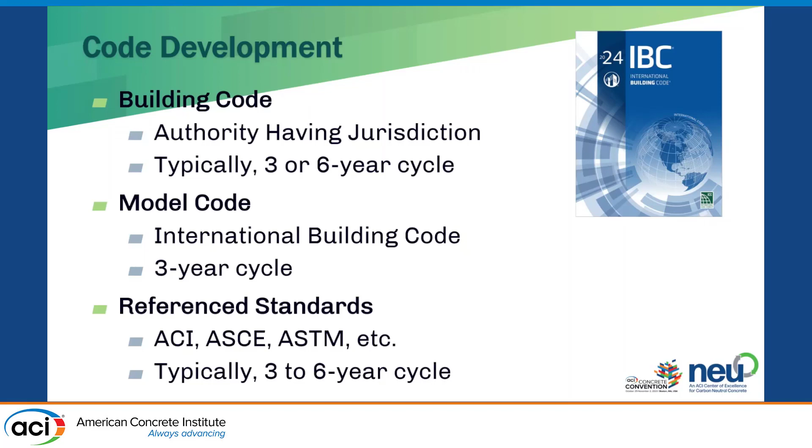ASTM and ACI standards, because of the complexity of the subject matter, can take 10, 15 years to get developed. So it is a relatively slow process. The reason a lot of this is slow, though, is we need the assurances that everything's going to work right. So that's an important aspect of this.

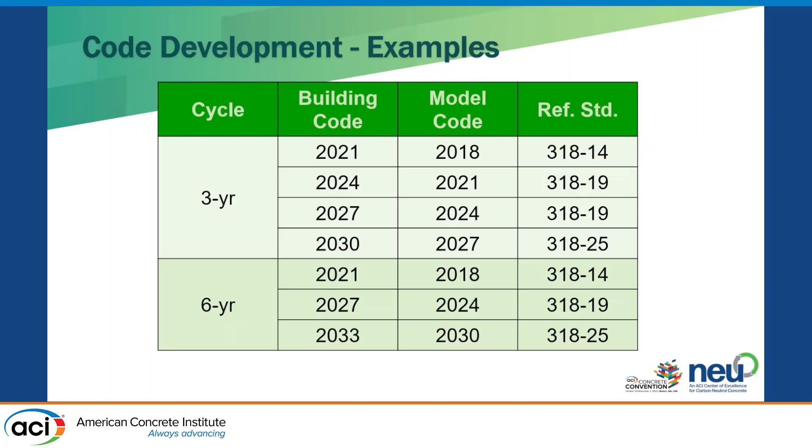But this gives you an idea of the building code referencing ACI Standard 318. ACI Standard 318 is on a 6-year cycle. If the local jurisdiction is on a 3-year cycle, and right now they might be looking at the adoption of, or developing, a 2021 building code for their jurisdiction, that would be based on a 2018 model code, which then references ACI 318-14. So that shows you the time lag that is out there.

When we're looking at the model codes, there's a model code where carbon neutrality of concrete or every other building material could fit quite well, and that is the International Green Construction Code. It's administered by the International Code Council. The technical content is actually developed using the ASHRAE process through an ASHRAE committee. It's ASHRAE 189. So it's a joint initiative. Again, the technical content is all handled at ASHRAE. ICC only focuses on the administrative content, or Chapter 1 of the code.

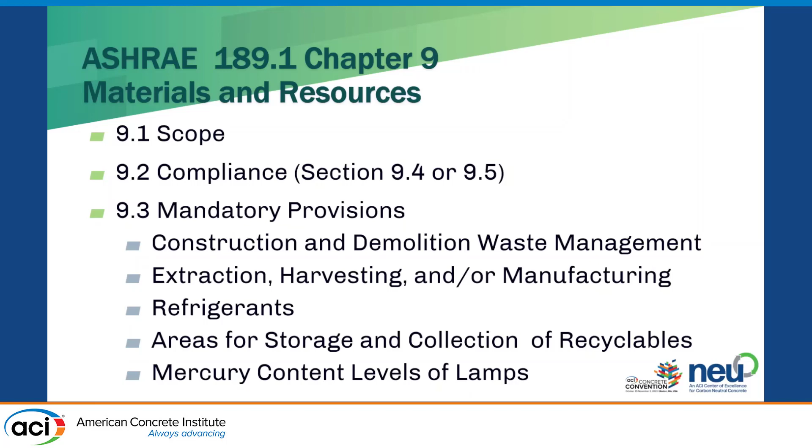What the code currently says is that you need to be reporting EPDs. It doesn't go into what level of performance needs to be required. Right now, we just don't have enough EPDs out there. So they're just trying to encourage more EPDs and allow the design professionals to make their judgment calls as to what products they select based on the available data. So it needs to be an industry-wide product declaration. A Type 3 declaration means it's verifiable and developed with approved product category rules.

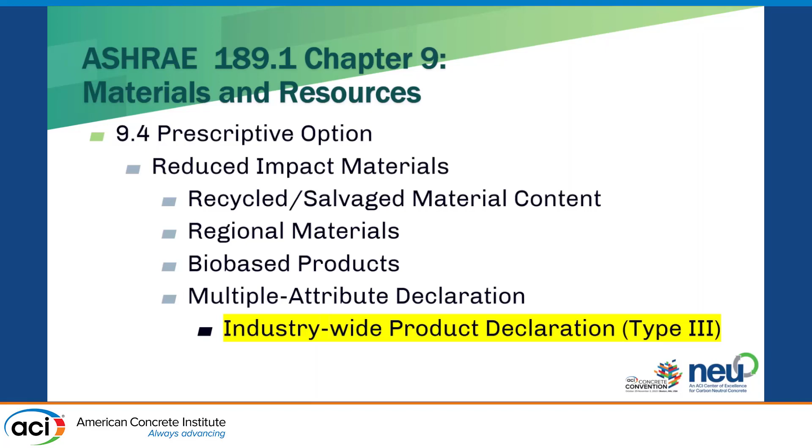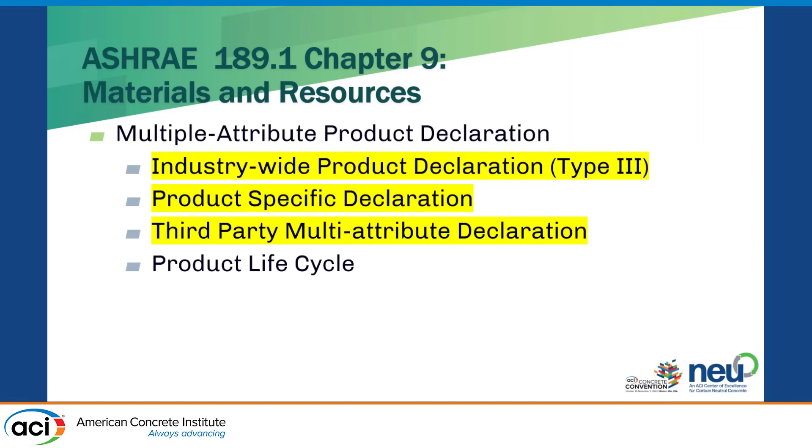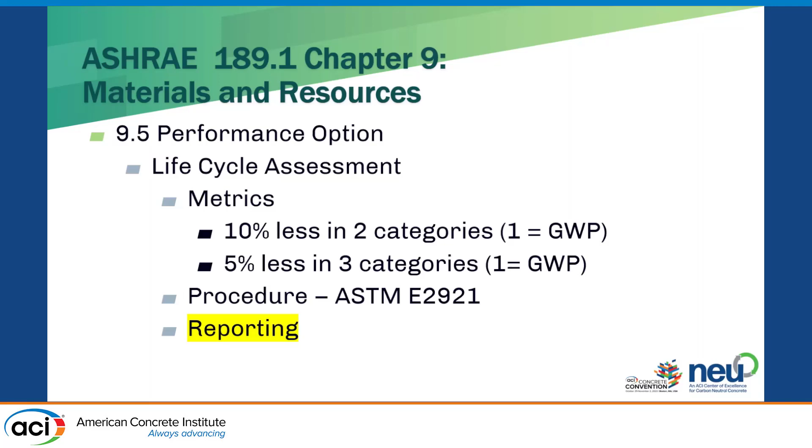So we have these environmental product declarations as well as other criteria such as, is the material regional, is it bio-based, recycled, but that's the extent that is covered when it comes to the attributes of materials in sustainability. So we have these options. It does require third-party multi-attribute declarations. So this information just needs to be generated and put out there. And the most important thing, as I previously mentioned, is they're really looking at getting the reporting out there so that everybody understands what we're doing and we can get a track record of how things work.

Now, the EPDs right now tend to be focused, at least for concrete, on these 8 categories. So this is what you'll see in a typical EPD for concrete if it's in the National Ready Mixed Concrete Association's database. That doesn't mean these are the only things that matter. I was talking about the ASHRAE 189 standard. That's ASHRAE 189.1 for new buildings except 1 and 2 family dwellings. But then there's other criteria that might be required depending on the particular application.

There's ASHRAE 189.3, that's for hospitals, and they're looking at some other possible considerations for what must be reported because of the potential for ionizing radiation, human toxicity, particulate matter. Those come into play if I'm dealing with a healthcare facility. So it depends on your facility and what can happen. If it's a healthcare facility, one of the things that might come up for human toxicity related to concrete wouldn't be the concrete itself, but it could be any sealers or coatings or materials that you're putting onto the finished concrete.

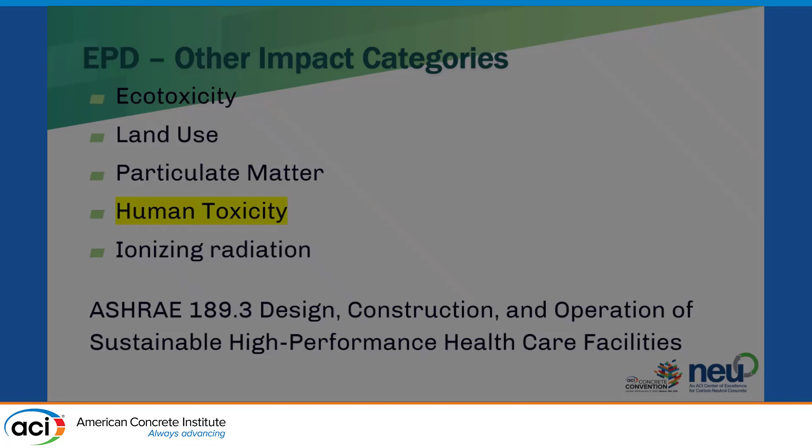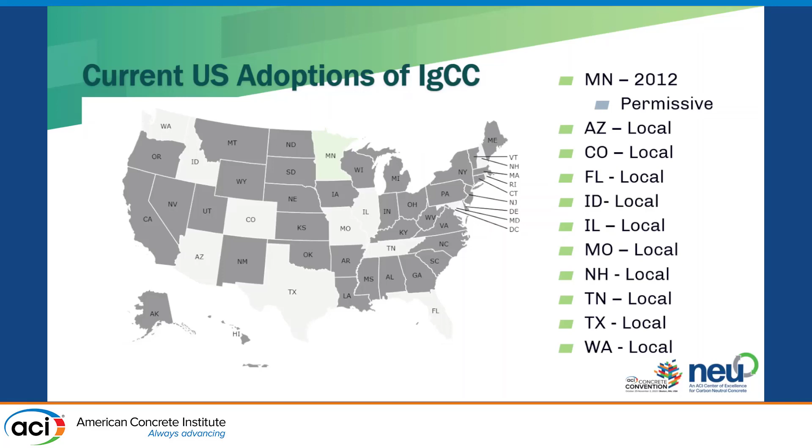So the IGCC is permissive in Minnesota statewide, and in all these other places there may be one or more local jurisdictions that have adopted the IGCC. So it has not been widely accepted across the U.S.

So the New Building Institute, a very aggressive organization trying to help get us to carbon neutrality, brought in a code change proposal to the International Building Code. This was brought in the last cycle. The code change, if you go to the ICC website, you can find it as S178-22, but it set specific limits on the CO2 content of mix designs based on compressive strength.

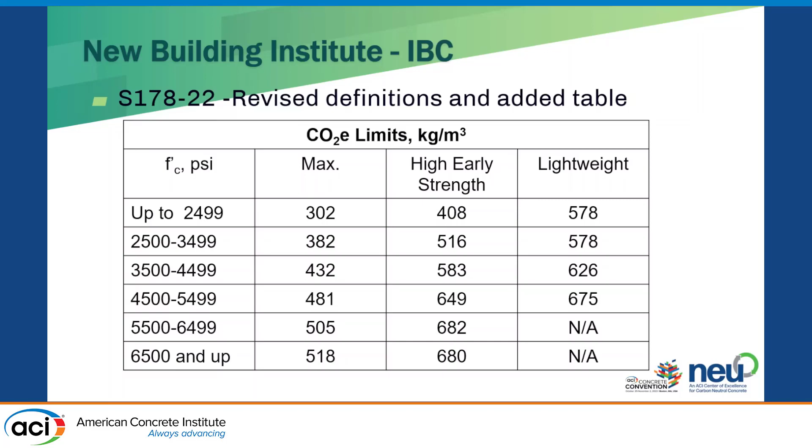So this was a proposal. It got disapproved. It was part of a huge proposal that was covering glass and steel and wood, and industry opposed it because it was viewed as somewhat oversimplifying the whole concepts, and the building code officials voted to disapprove it because they didn't want it in the general building code. They felt it belonged more in the International Green Construction Code.

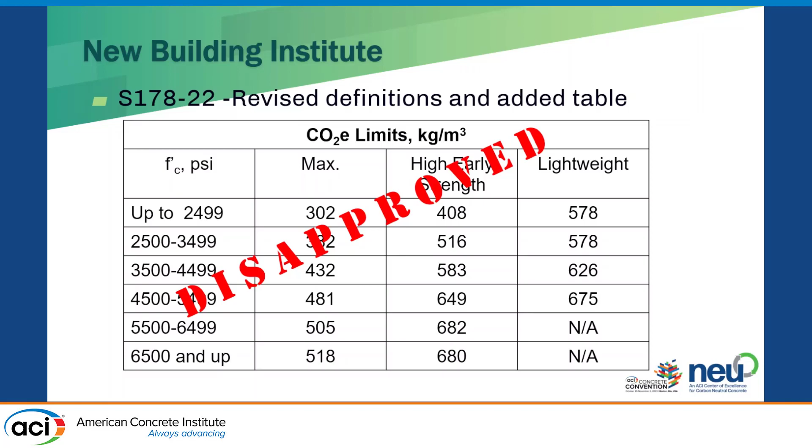So there was just this general conflict of, well, we want to make something happen and we wanted to make it happen everywhere, and the IGCC is only adopted in a few places, so it became cumbersome, to say the least.

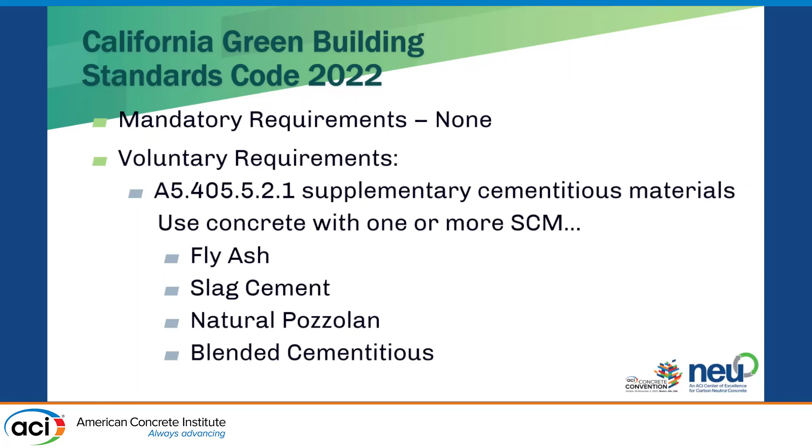There is also the ICC 700, which is the National Green Building Standard. This is for 1 and 2 family dwellings. There is Chapter 6 on resource efficiencies. So they do address that. They do talk about things that you can do, but they're voluntary requirements when it comes to using concrete with 1 or more SCM. But again, it's moving in the right direction. It's a slow process because of all the complexities tied to this.

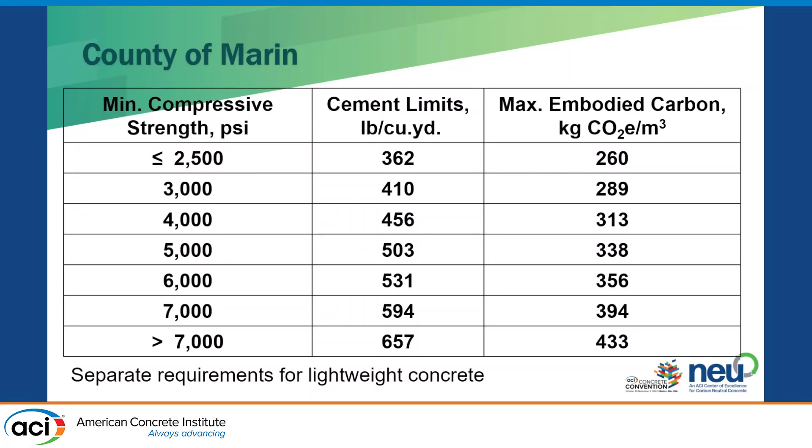Marin County in California took the NBI recommendations. So in Marin County, California, there are currently these limits for CO2 content of your concrete mix designs.

Washington State: NBI made this proposal to make modifications to the building code to comply with their section 1901.8.1, and it exempts small projects, it exempts precast and shotcrete. So it's viewed by some that this might be upside down.

The low-hanging fruit might be low dosage Portland cements for sidewalks, driveways, foundations, footers, small projects where there's a lot of them. Just like Mary was saying before, the concrete by itself doesn't look all that bad on her graph as far as the global warming potential. It's just that there's so much of it. So why not go after the larger volumes of concrete versus larger building types?

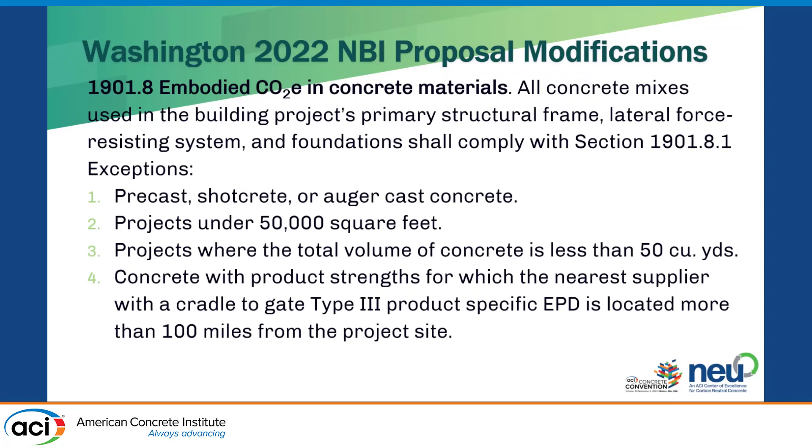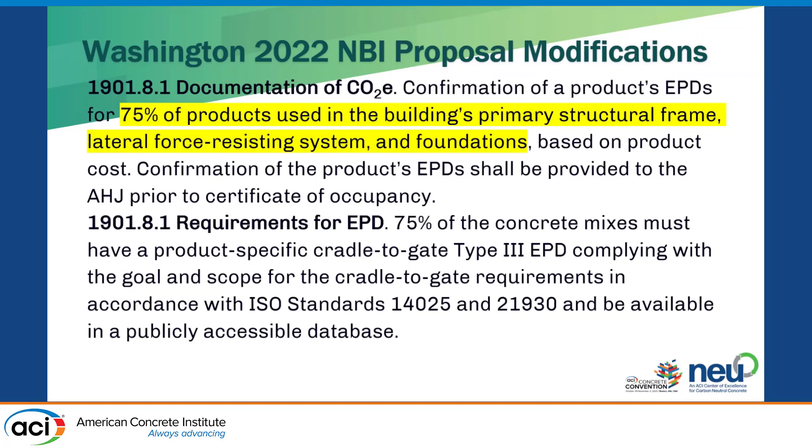So as we continue to look at this, this is pretty common as to what happens when they try to bring these specific requirements in. It tends to get backed off because of the comfort level of those writing the rules and regulations, so that it ends up being report EPDs. There's not enough EPDs out there for all the concrete.

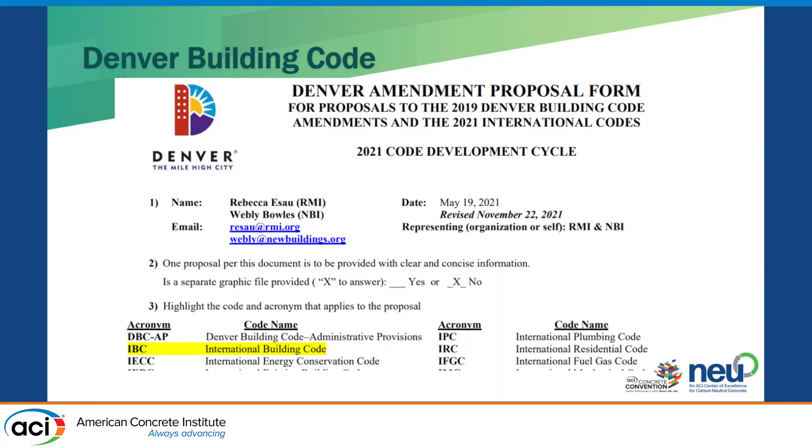And these are just some examples of what is out there to show you the types and style. Sometimes it's a regulation, sometimes it's a code requirement, sometimes it's legislation. There's varying degrees of what is happening out there. The Carbon Leadership Forum says there's 230 plus entities worldwide that already have some sort of rule or regulation about carbon neutrality.

So here, this is an example out of the General Assembly in Colorado, where it says to do a state project, you must have a current environmental product declaration. Again, that tends to be where we're at in most jurisdictions now. Similarly, Oregon. Then there's a database. The Oregon Ready Mix Concrete Association has a database for their producers, or a few of their producers, to help get the information out about the EPDs.

So when we look at the recommendations from the federal agencies, the EPA was given the responsibility to come up with a recommendation for all the other agencies on how to measure and set limits on the carbon neutrality of building materials. So for concrete, they're saying 20% less embodied greenhouse gas emissions, or 40% less greenhouse gas emissions, or simply better than industry average. And that depends on what's available locally.

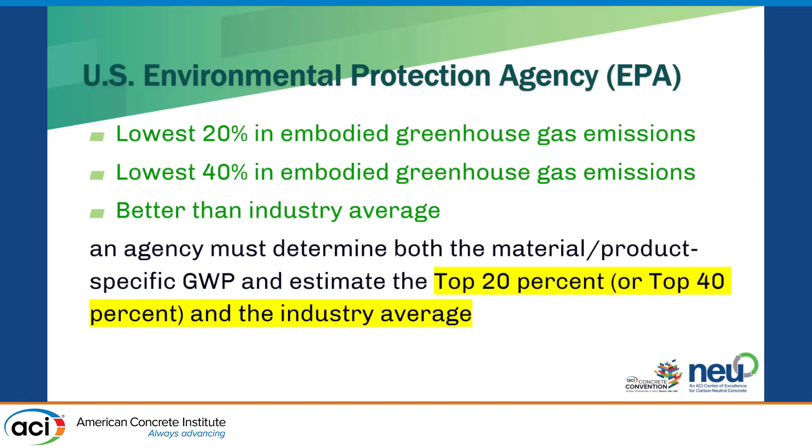So they give you these 3 options. If it's around, you must use it. If it's not, you fall into the next category. If not, you fall into the 3rd category, which is just better than industry average. So it's either the top 20%, the top 40%, or just simply better than industry average. What's industry average? Is it industry average of those who have produced EPDs? Or is it really intended to be an industry average?

The NRMCA database that's out there now: there's more than 7,000 ready-mix plants. There's over 2,000 ready-mix producing companies. The NRMCA database has 60 companies reporting data. That's less than 3% of the industry that's reporting. There's 303 plants reporting, and that's only 4.5%. So what is that industry average? We're nowhere close to having anything that can be statistically demonstrated as being an industry average.

So this gives you an idea of where the things are being reported, and it tends to look a lot like the most reporting is happening where there's some sort of rule, regulation, or code requirement. Oregon, Washington State, Colorado, California, the reporting seems to be coming around as the jurisdictions are starting to require that EPDs be reported or go even further as far as the development of the provisions to reduce or to improve carbon neutrality.

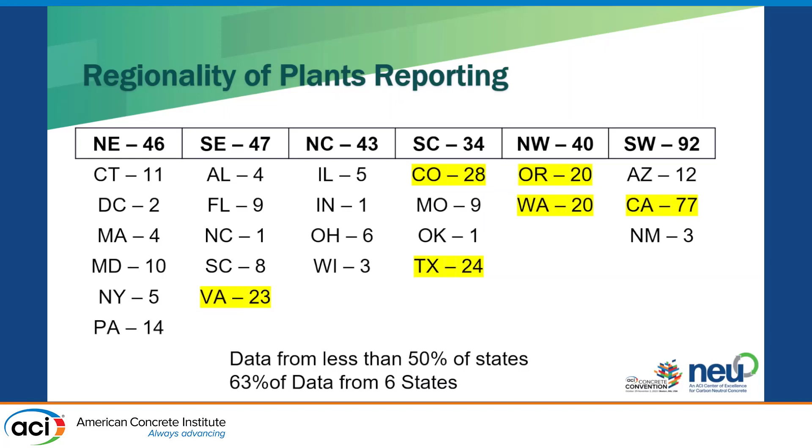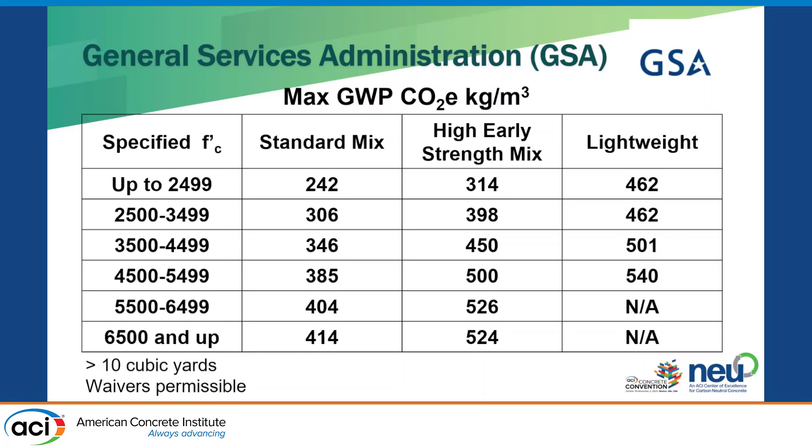The General Services Administration, for all of their projects, basically requires the same thing that was adopted in Marin County. This is the table that's being promoted around the nation by the New Buildings Institute. So again, the EPA set the framework and then directed both the FHWA and the GSA to come up with a method of compliance. And this is all from the federal legislation, the Inflation Reduction Act.

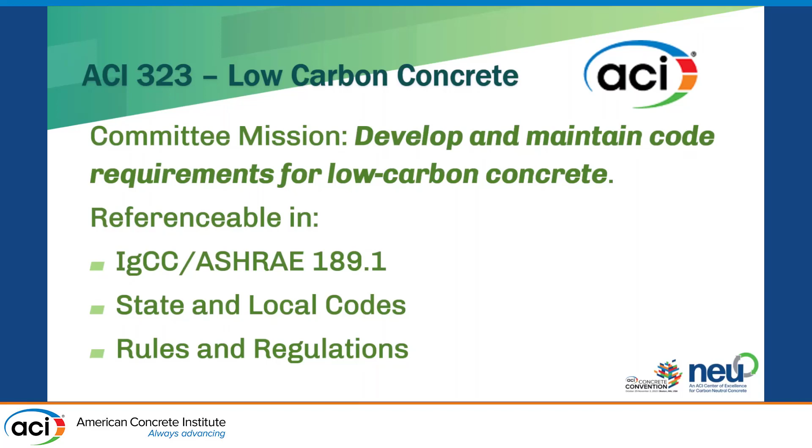So ACI now has a newly formed committee, Low Carbon Concrete. They met for the first time at the last ACI convention. They are trying to put something together that can be referenceable in these other codes to try to move things forward. And again, it's complex. There's so much that should be dealt with or needs to be considered when we're dealing with this. Should it just be compressive strength? We get questions about that.

There's cap limits already in 318 and 301, the design standard or the minimum code requirements and the specifications for structural concrete. If you have, for example, a saltwater exposure where you have freeze-thaw conditions, your SCMs can't go over 50%. It's just prohibited by the code right now. So other things need to happen.

If we're going to take the approach of, well, what can we do to encourage carbonation to occur in the concrete once it's placed, the in situ reabsorption of CO2? Well, as the carbonation occurs, the protection for the reinforcing steel is going to diminish. So are you compromising durability of the rebar by having carbonation occurring in your concrete? There is no one simple solution, and it does get really complex, and we're trying to handle it with very simplified code provisions.

So the American Society of Civil Engineers, through the Structural Engineering Institute, has a sustainability committee. They're also working on guidance documents for the structural engineers to make informed decisions. ASCE also has a standard practice for sustainable infrastructure. It's pretty benign, but ASCE 73 was just released this year. But also at ASCE, they are creating a database of the overall impacts through life cycle assessment models of all buildings, but there's a fair amount of concrete buildings in their database.